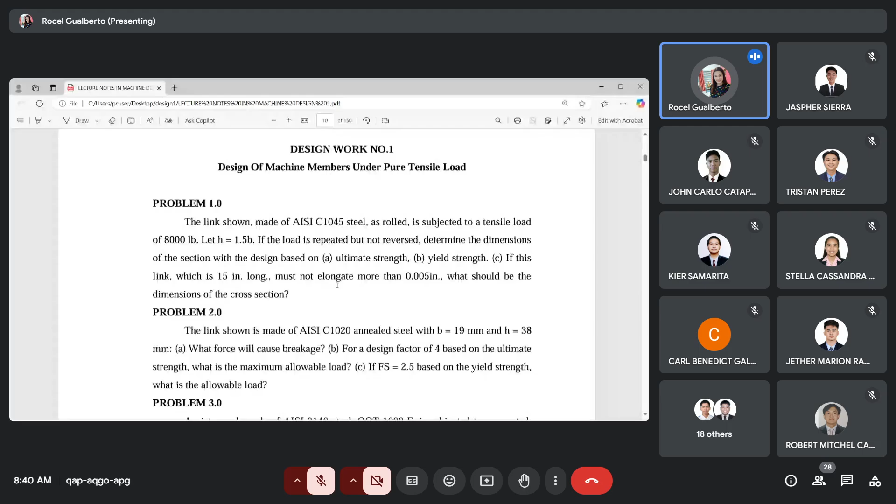Okay, so let us have here another sample problem. So, yung last po natin, yung kahapon, that is tension, but then, ang nakita lang natin, what is present only is the strength failure. So, ito naman ngayon, yung sample po na to, this problem 1, this defines now included na dito yung kanyang deformation failure. So, dito po ay paano natin malalaman na merong deformation failure if you have this phrase: must not elongate more than 0.005 of an inch.

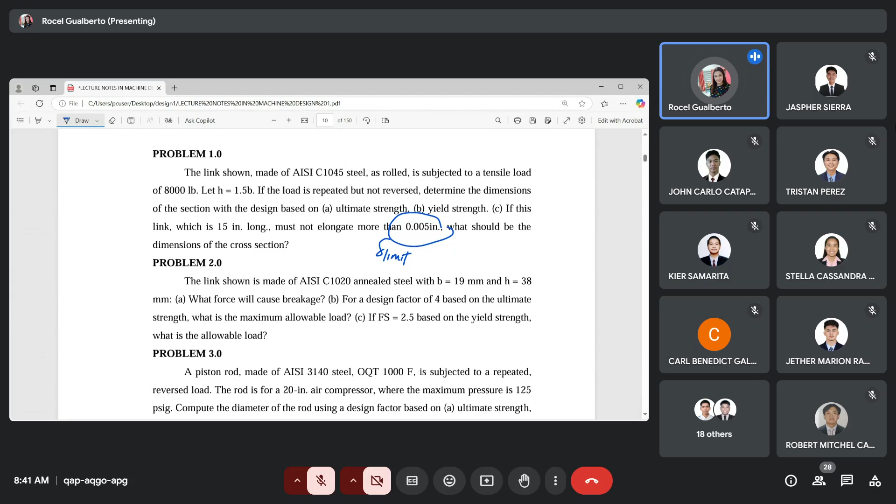So, yan po yung indicator po natin na meron po siya na allowable limit of deformation. So, if you have this value, then, ibig sabihin sa solution mo po. So, let us have this sample problem and then we try to solve this po.

So, link shown made of C1045 steel as rolled is subjected to a tensile load of 8,000 pounds. Let H equal to 1.5 B, and if the load is repeated but not reversed, determine the dimensions of the section with the design based on the ultimate strength for letter A. For B, it's the yield strength. It must not elongate more than 0.005 inch. What should be the dimensions of the cross-section?

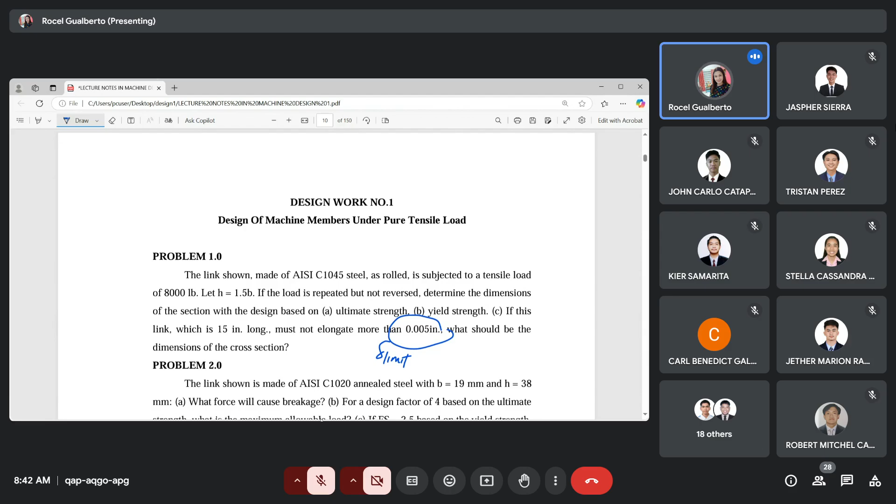So, ang isosolve po natin dito is yung ating letter C, and along with letter A. So, ang gagawin muna po natin, based on the strength failure, ang kukunin natin muna is yung base sa ultimate strength, and then we compare that with our answer based on the deformation failure. So, ayun muna po. And then, yung for letter B, kayo po mamaya yung mag-solve po nun. So, let us have this first.

So, again, we follow our procedure for the design. So, we start again with the given values. So, what are the given? First, you have there the tensile load, FT, that is equal to 8,000 pounds. So again, this is equivalent to 8 kips, divided by 1,000. And then you have the relationship H is equal to 1.5 B. So we call that the allowable limit of deformation equal to 0.005 of an inch. So these are the given values.

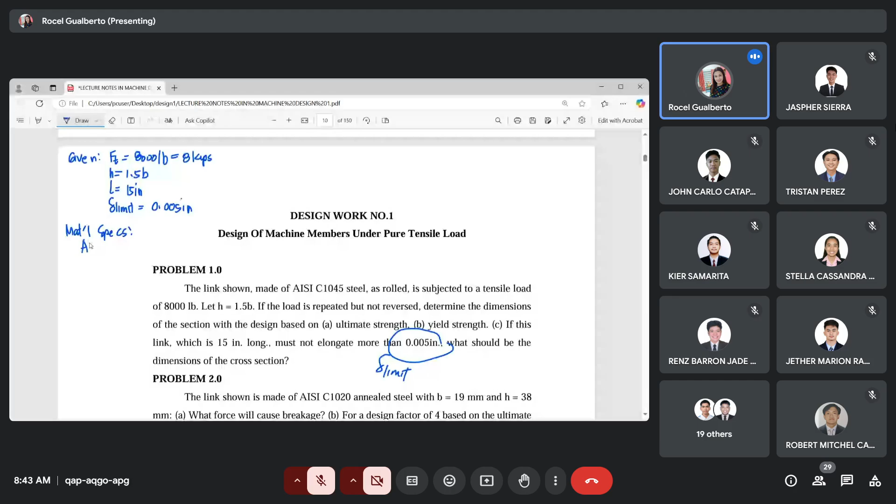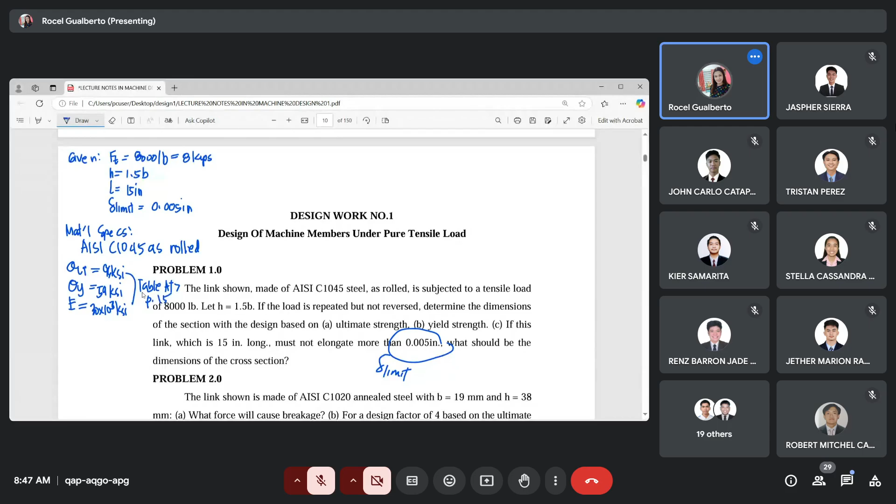After the material specification, we go with the factor of safety. So sa factor of safety po, ang sinusolve lang po muna natin is based on the ultimate strength, and you have there the deformation failure. So ito lang po ang unahin. Type of load: we have the repeated but not reversed. And then the type of material, this is 1045, therefore ductile. And then the basis of design, based on ultimate. This is for letter A. So with these conditions, repeated but not reversed, ductile, and based on the ultimate strength, what is then our factor of safety?

Ano po ang FS natin? Kier, what is our factor of safety? Hello? You use table 1.1 to define this factor of safety. What is the factor of safety? 6 po. Repeated but not reversed, ibig sabihin yan, repeated and one direction. And then ductile and based on the ultimate. What is the value, Kier? So that would be equal to 6. Thank you, Lan. So the value of the factor of safety is equal to 6, taken from table 1.1, page 1.

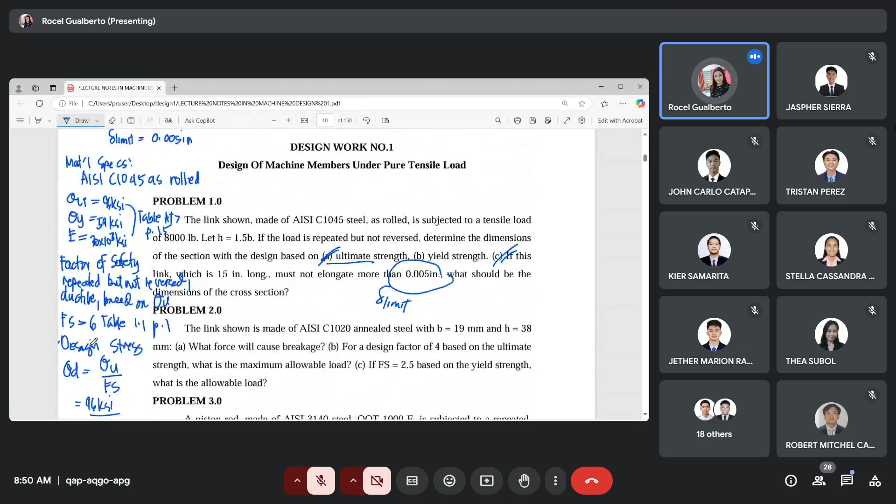Exactly 16 KSI. Okay, thank you. So you have here the design stress equal to 16 KSI. Again, after po ng design stress, doon po natin ilalagay yung atin pong basis ng design. Okay, yun pong ating procedure and the designing based on the strength failure and based on the deformation failure. Okay, so unahin po muna natin yung sa strength failure. So, considering the strength failure.

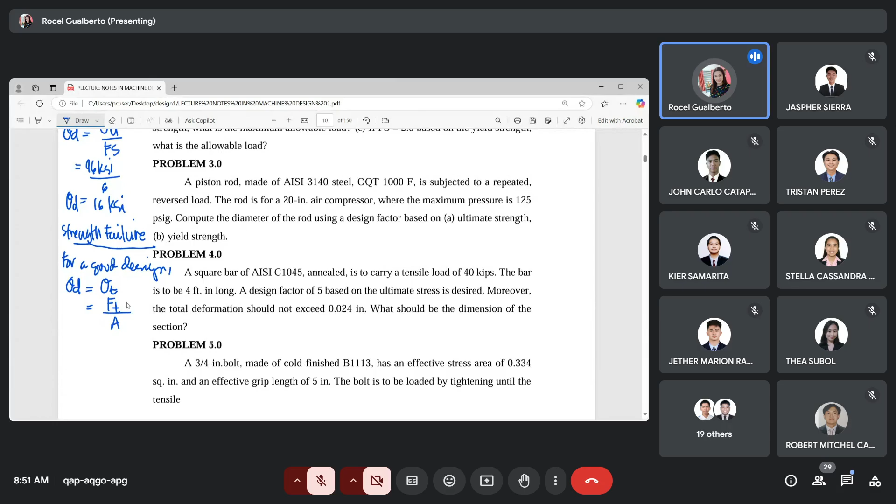Anong sabi natin? For a good design, using the strength failure, you have to equate the design stress to the induced stress of the material, which is the tensile stress. So, for the tensile stress, that would be force over the area. And what would be the area? So the area here would be yung atin pong para sa reaction is B. Relationship between B and H: H is equal to 1.5 of B. So in place of H, gagawin mo po siya na 1.5 of B. So anong magiging ito ngayon? This would be FT over B times 1.5 of B.

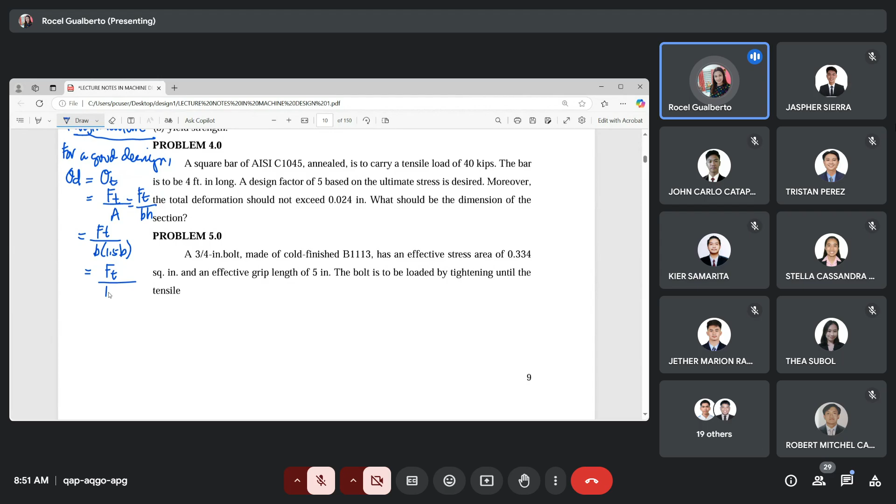So, leaving us FT over 1.5 B squared equal to your design stress. And then you substitute now the value. So the design stress na na-compute po natin initially is 16 KSI equal to 8 kips divided by 1.5 B squared. Kindly solve now for the value of B. Pakisolve nga po yung value ng B. Okay, so thank you, Tristan. 0.577 of an inch. The others, try to compute po yung iba. 0.577 of an inch. And then you look for the standard value. Likewise, you solve for H. This would be equal to 1.5 of the commercially available size.

So, pakicompute po. Now, idugtong ko muna, habang kino-compute nyo po, yung para sa deformation failure. Meron siyang deformation failure kasi may given po na allowable limit of deformation, yung pong 0.005. So, isama po natin ngayon siya sa solution. Ano nyo po yung commercially available size nito, same thing with the value of H. So this is 5/8 and 15/16. So this is 5/8 of an inch and 1.5 times 5/8 of an inch. That would give us 15/16 of an inch. Okay, so the other one would be the deformation failure.

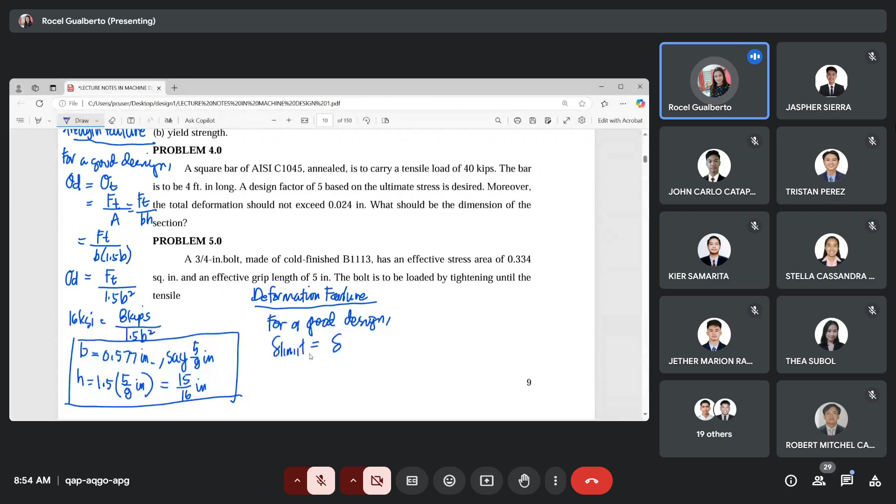So for the deformation failure, ganun din po. We equate for a good design. Ano naman po ang ine-equate natin considering the deformation failure? You equate the allowable limit of deformation to that of the computed deformation. So what would be the computed deformation? This is simply equal to FL over AE. And in place of A, papalitan natin ulit siya ng B times H, and yung H po natin is 1.5 of B. So magiging 1.5 B squared times the value of E equal to your allowable limit of deformation.

Now i-substitute nyo na po yung mga values. So this is 0.005 of an inch equal to 8 kips, length is given 15 inches, and then you have there 1.5 B squared, and E is 30 times 10 to the third KSI. So, yan po yung sinubstitute natin na values. And then, what is the value of B considering your deformation failure? Paki-compute po.

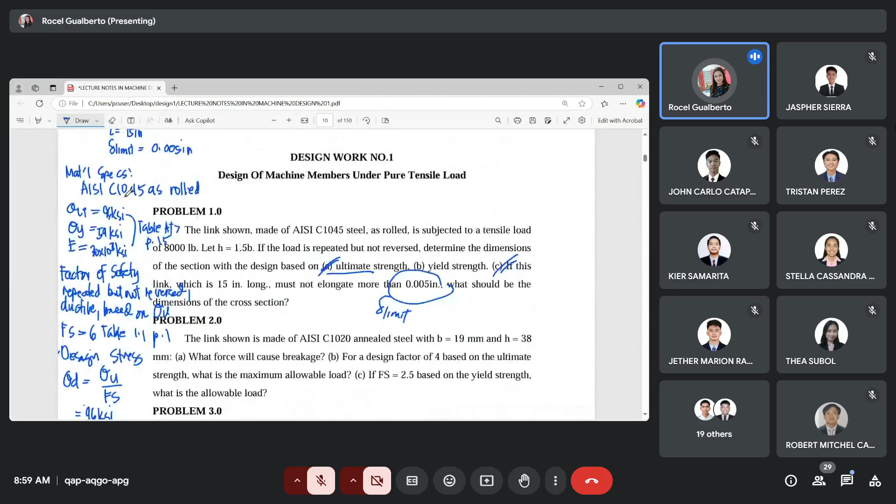Okay? So, yan po yung ating sagot ngayon. Now, so this is the final answer. So, ang ating pong solution, it has yung strength and deformation failure. But I have said, pertaining to this problem 1, yan po ay letter A lang. So, ang sagot po natin sa letter A, ito lang po talaga yon, yung sa strength failure lang. Itong 5/8 at 15/16.

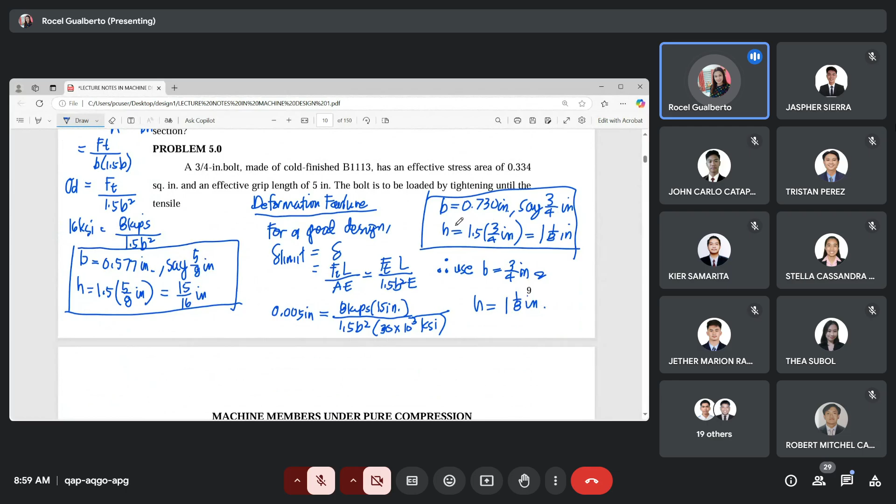Pero pagdating mo po sa letter C, ang sagot mo po sa letter C, itong dalawa. Itong buong to. So, dapat may strength failure ka, may deformation failure ka, tapos ito yung pili. 3/4 and 1 and 1/8. So, you go now with letter B. So, paano mo naman po isosolve yung letter B?

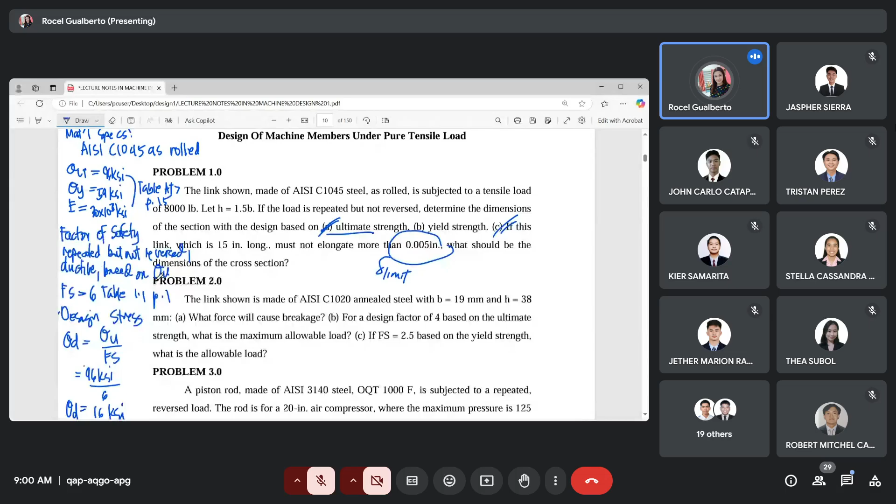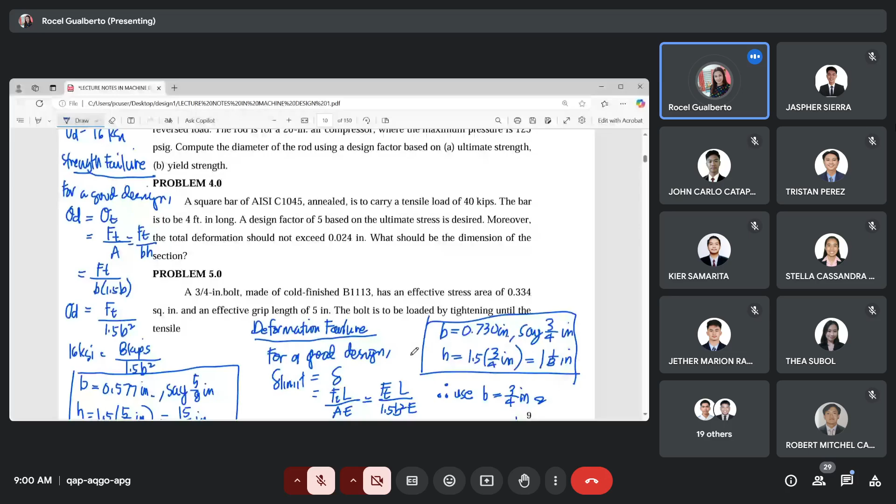Kasi iba na yung factor of safety because the basis of design now would be the yield strength. So, mapapalitan po ang Fs, ang design stress, same thing with yung sa strength failure po natin. But then for the deformation failure, hindi po yan mababago, because this is not dependent on your value of sigma u or sigma y. So, ito pa rin yung sagot.

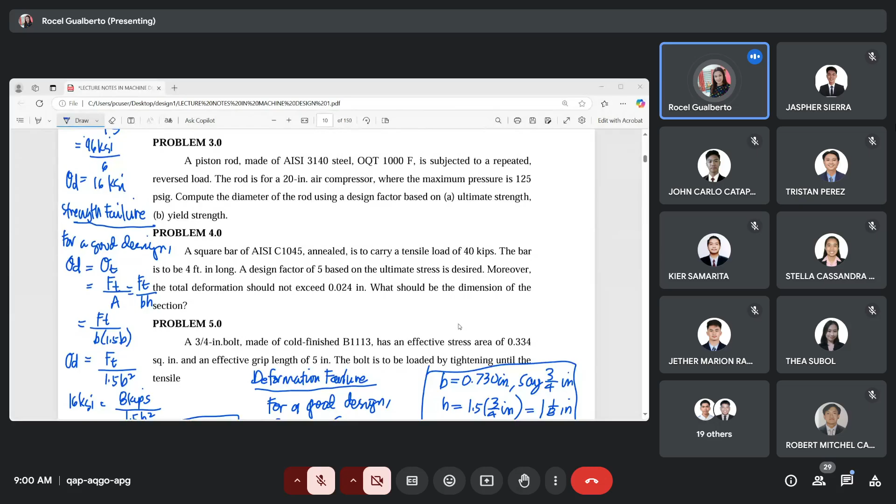So, ang gagawin mo ngayon is to compare. Ano yung nasagot mo based sa strength failure, based on the yield strength, and you compare that again with this value of the deformation failure. Whichever would be higher, then that would be your conclusion. So, ganun nyo po ngayon gagawin, yung para po doon sa basis ay yung yield strength for that of letter B. So, B yun, tapos kadugtong din nun yun yung sa letter C.

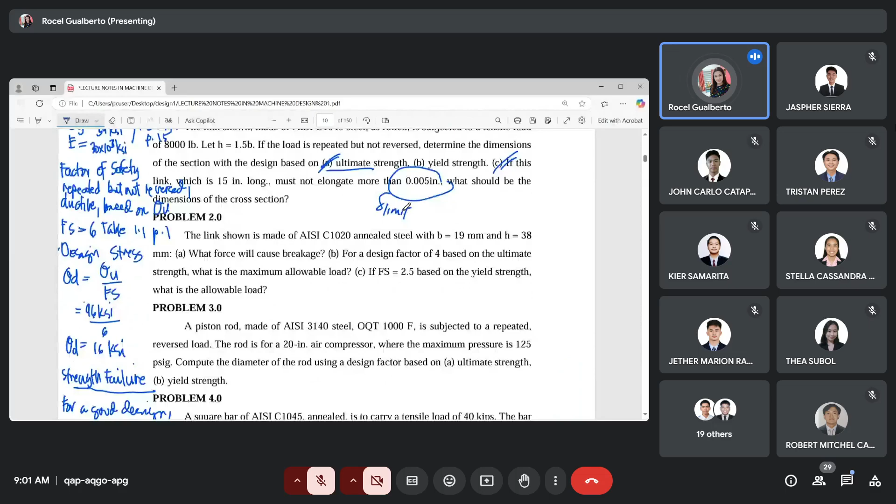Okay, sige po, gawa nyo muna po yung para doon sa basis ng yield strength, and tingnan natin ano yung ating magiging sagot. So again, simula po sa factor of safety, factor of safety up to the strength failure. Yun lang po yung gagawin mo based on the yield. Sige po, continue. And then you post your answer here po. What would be your answer on the strength failure on this basis of yield strength? Tapos compare with the deformation failure po natin afterwards.

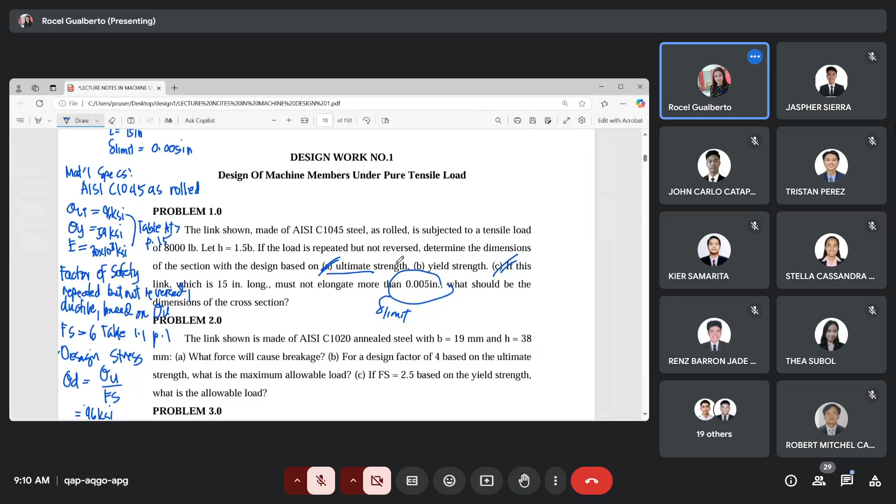So, linawin ko lang po ano po yung mga sagot natin for this problem 1. So, pag dito po sa letter A, determine the dimensions of the section with the design based on the ultimate lang. Kumbaga, hanggang dito lang yung letter A. So, pag letter A lang, ang i-consider natin, strength failure lang po yan. So, ang sagot po sa letter A, yan po yung 5/8 and 15/16. Yan po yung sagot.

Pagdating naman po sa letter B, based on the yield strength lang. Based on the yield strength lang, ang sagot mo po dyan, yung sinolve nyo po, na 9/16 and 27/32 of an inch. Yun po lahat lang sa letter B.

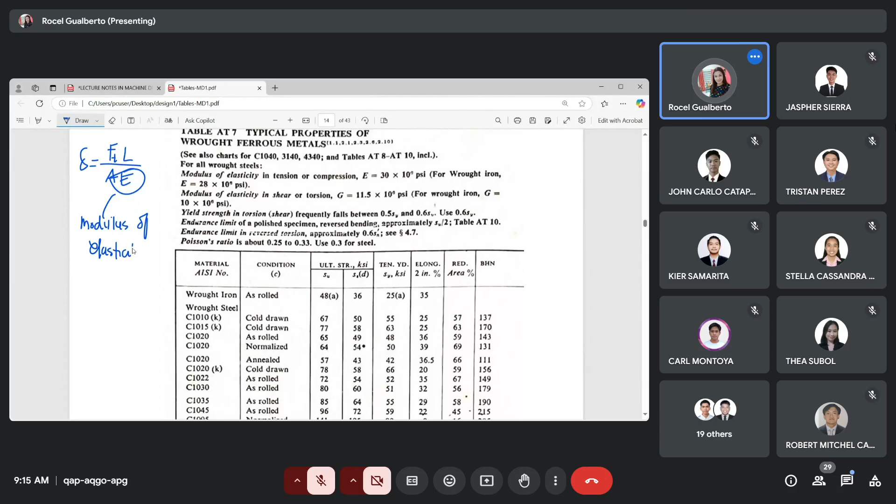Okay, over area times E. E here pertains to modulus of elasticity. Okay? This is modulus of elasticity. Okay, so this one, this is simply an elongation.

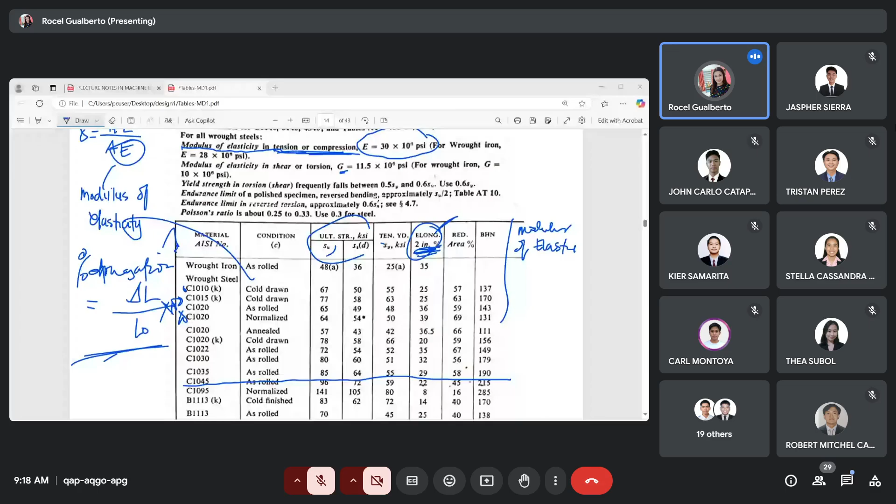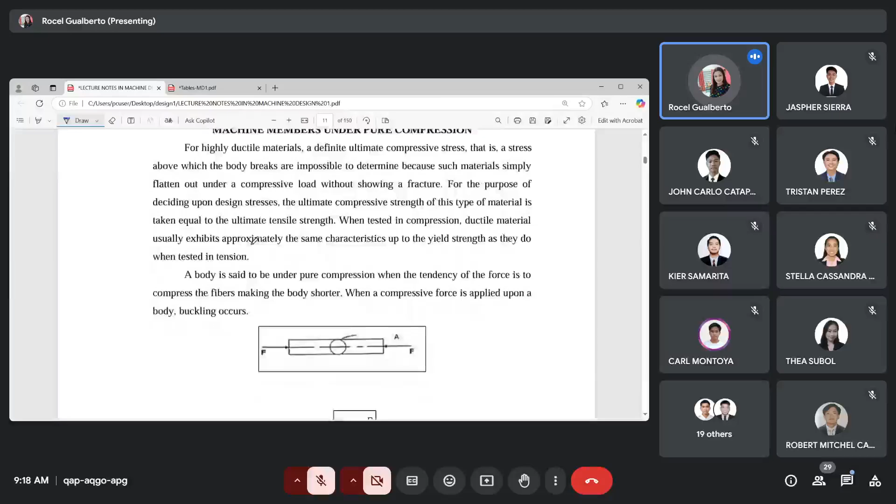Let us have now the second topic, which is this time the member is under pure compression. So, what is basically different? The applied load now tends to compress your material. So, it pushes on the area of your material. Hindi po katulad nung nauna, hinihila niya.

Push naman po yung ginagawa, or it tries to compress the area. Okay? So, you look at the illustration here, the member. This is your compressive load. This is your material and then the applied load FC.

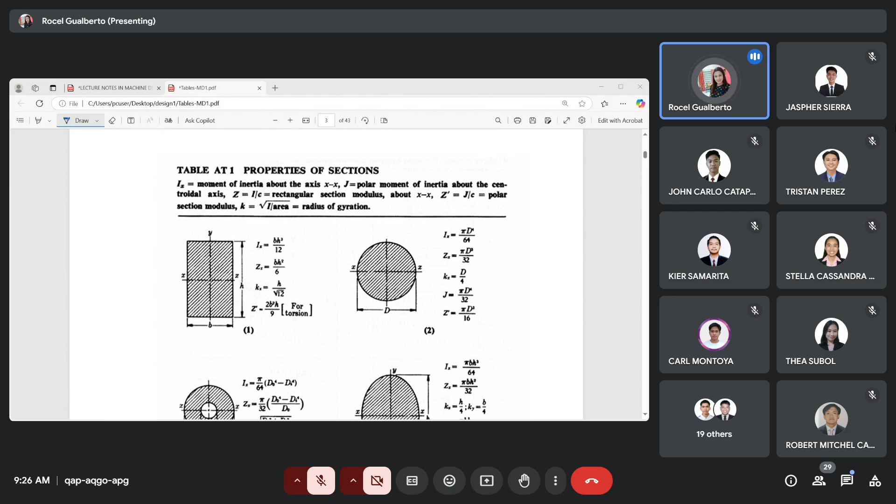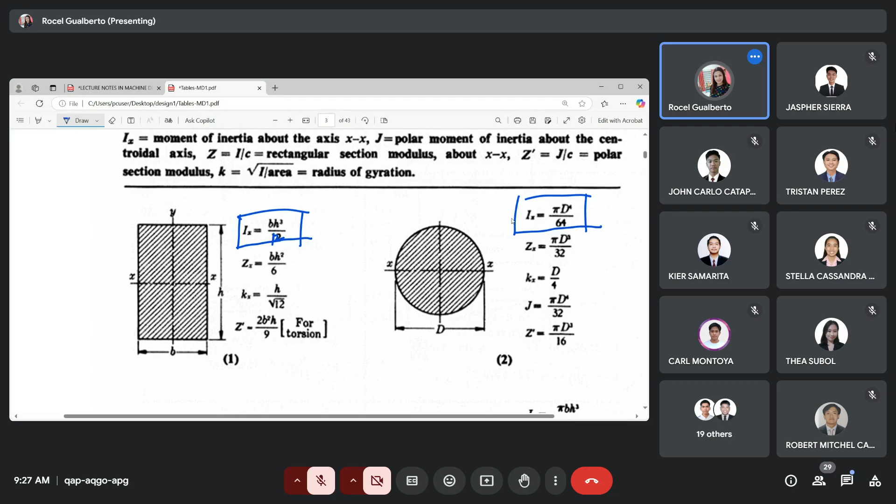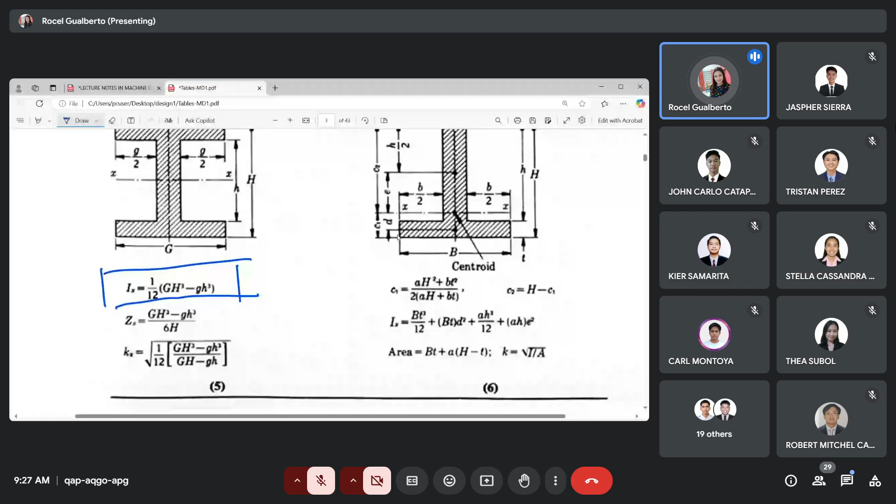Ito po yung tinatawag natin simply as economic sections. I hope alam nyo po paano gamitin, paano i-derive ang economic sections. Dito po, limited kasi it's limited only to these two types of economic sections, yung letter I at saka inverted T.

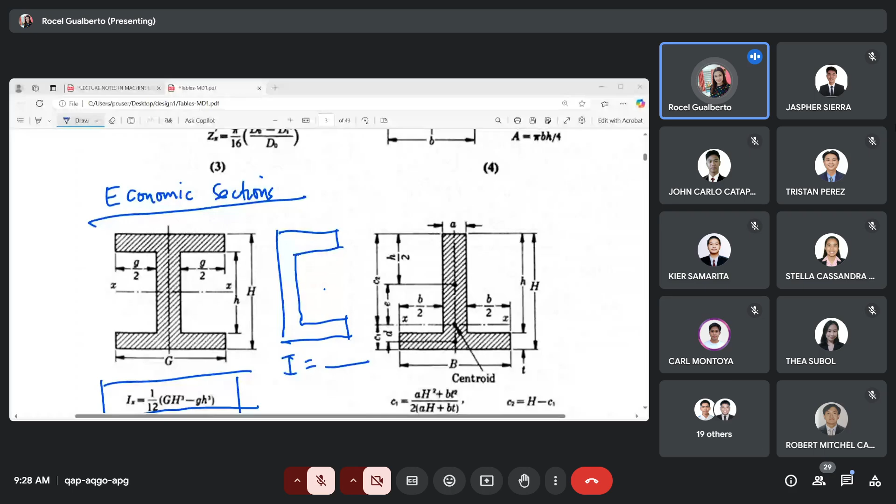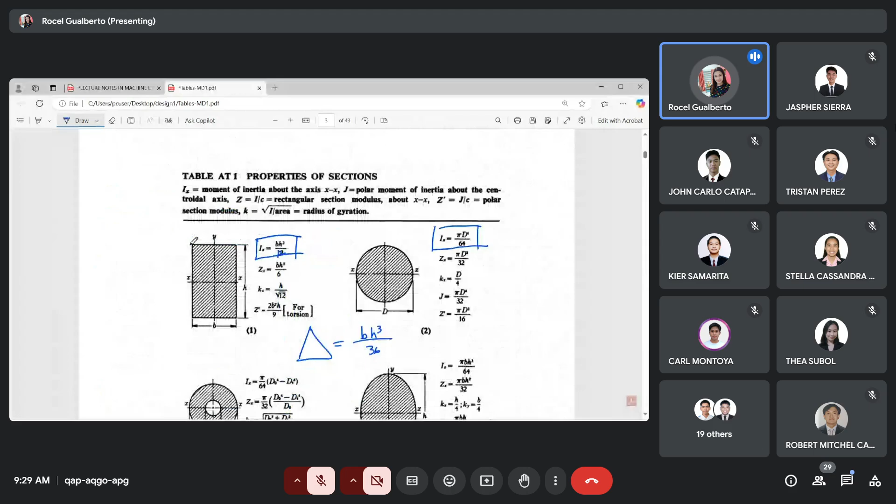Paano po kung bigyan tayo ng letter C na cross section? Dapat tandaan natin kung paano ba... I will be recalling again kung paano siya gawin. But if you have your notes pa rin dati sa MDB, pwede nating balikan at makita kung paano ang mga values ng I or moment of inertia ay na-derive. Pero for the moment, pwede tayong gumamit ng table AT1 para sa values ng I. Limited lang po siya sa mga cross-sections na ito. Kung binigyan tayo ng iba at hindi natin alam mag-derive, wala tayong magagamit as our value of I.

Saan po natin gagamitin ang moment of inertia? It will be used for the least radius of gyration, which is the square root of I over the area. Ito po yung moment of inertia.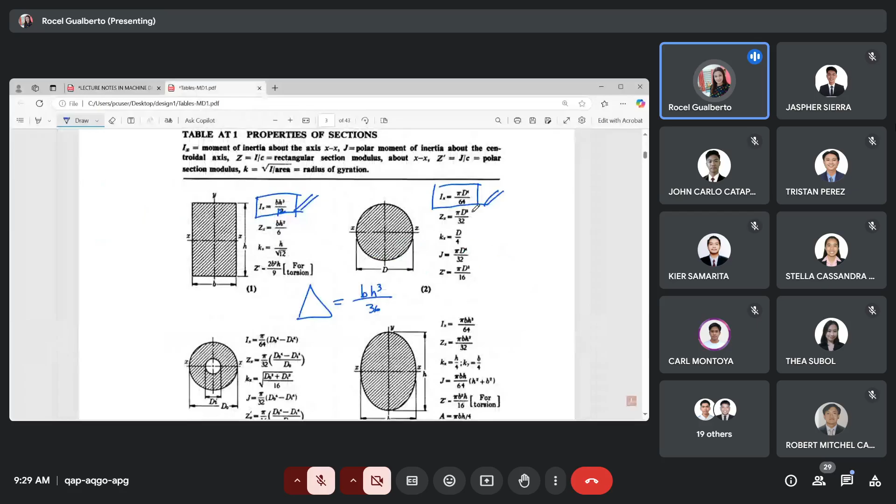Let us take the case if you have a circular cross-section. Let us derive the value of K, using I over the area. Ano ba yung I if you have a circular cross-section? Pi d to the 4th over 64. Yun po yung ipapalit natin dito in case of I.

So this would be equal to square root of pi d to the 4th over 64, divided over pi d squared. You can cancel out pi. You have d to the 4th and d squared, may dalawang matira, 4 and 64. This is 16, so ano na lang ang natira? That would be square root of d squared over 16. And this is a perfect square, so pwede natin ilabas ng radical sign. This would be equal to d divided by square root of 16, which is equal to 4.

So yan po ang ating K, d over 4. This is valid only for a circular cross-section. For other cross-sections, halimbawa rectangular, you need to derive ulit. Kapag rectangular, you start with K equals square root of I over area. Ano yung I? For rectangular, BH cube over 12. Ano yung A? That would be B times H. Saka nyo po uli siya i-simplify to obtain the value of K.

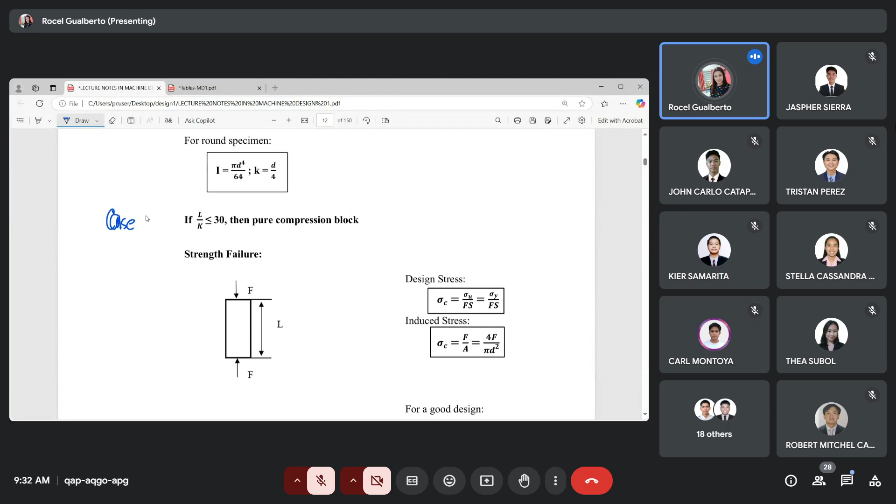So this would be your first step in designing a member: solve for K, then the length divided by K, and once alam na natin yung slenderness ratio, you go with this, so this is what we call case 1. Case 1 is when slenderness ratio is less than or equal to 30. Kukunin mo muna, first step mo is to obtain the slenderness ratio.

Kung nakuha nating slenderness ratio is less than or equal to 30, then we call it a pure compression block. Alin yung pure compression block? A pure compression block are those compression members wherein kapag in-applyan mo ng compressive load, it simply has contraction - yung parang maliliit na members, katulad ng sample ko kanina, na pag in-apply mo ng compression, ang tendency ay magkaroon lang ng contraction, mag-reduce lang yung kanyang original length, having a slenderness ratio less than or equal to 30.

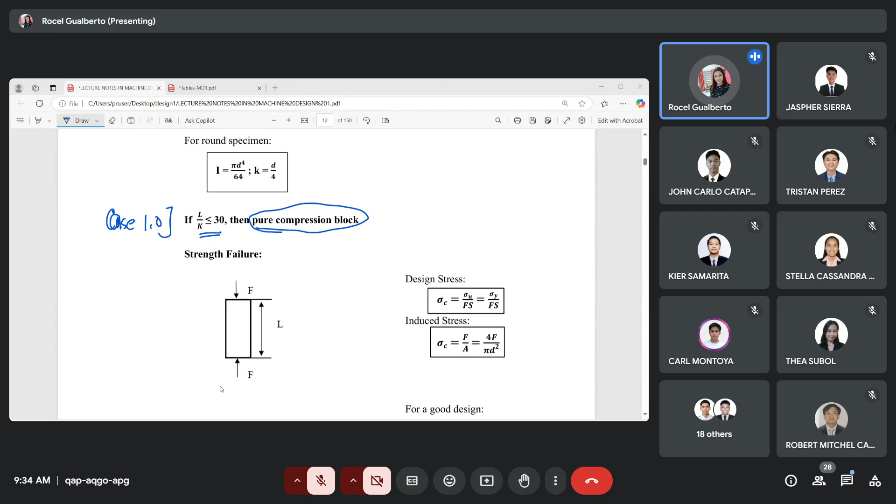Paano natin i-design yung ganitong klase ng compression member? I-design mo siya katulad lang ng sa tension. Ganun din lang kasi yung nangyari sa kanya - ang pinagkaiba lang, yung isa ay elongation, this time it is contraction. Sa halip na humaba, ngayon umikli, pero basically, same lang yung effect. So you have to design it katulad noong sa tension natin. Paano nga ba ulit natin dinesign yung ganun? It is based on the strength failure, and then the other one is based on the deformation failure. Parehas lang po yung procedure natin. Pag strength failure, for a good design, you need to equate the design stress to the induced stress of the material.

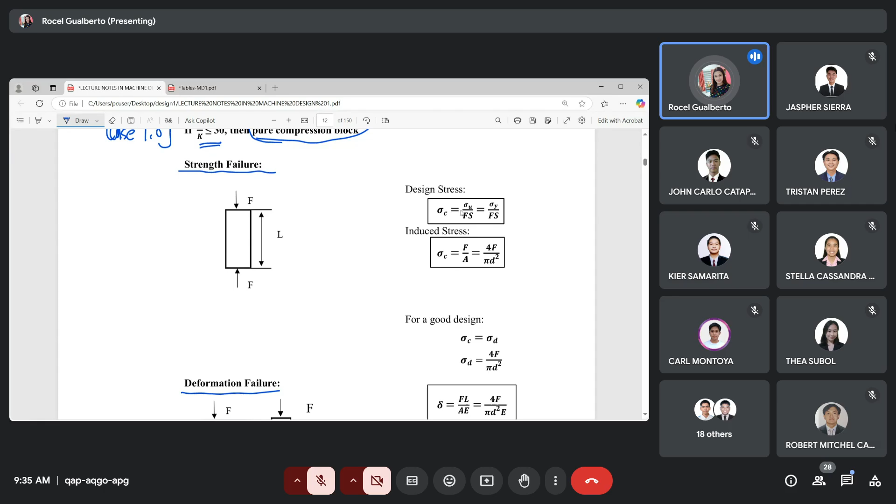Okay, what is then our induced stress ngayon? So ang induced stress po natin dito, ang tawag po natin ay compressive stress. Okay, so compressive stress po ang tawag. So for the compressive stress, ang symbol po natin is sigma and then subscript C.

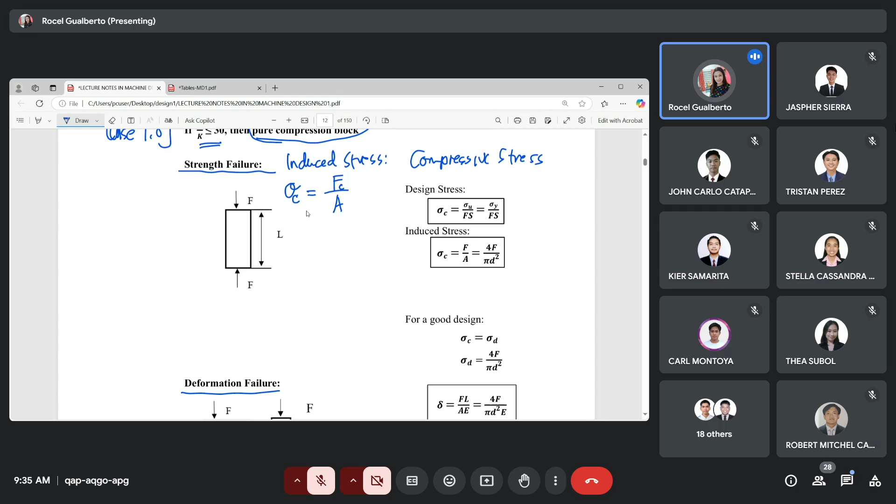So same equation po yan doon sa tension. So force divide area. This time lang po, ang ginagamit natin is a compressive force. Okay, at kung po yan ay halimbawa circular ulit, okay, ano po pi d squared over 4. Okay, so ito lang po yung napapalitan, yung A po natin. Kung rectangular po yan, ano yung A na yon? It would be base times the height. Okay, so yan po yung kanyang induced stress.

And when we say if it's a strength failure, for a good design stress, okay, so you equate the design stress with the induced stress of your material. Okay, so ang induced stress natin is the compressive stress. Okay, and what would be the equation?

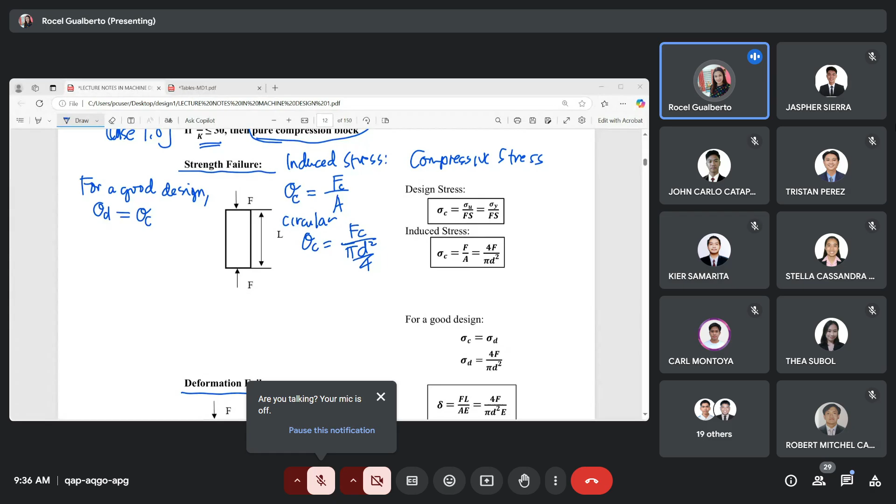Okay, so what would be the equation? Okay, so this would be equal to FC over A. Or you say kung circular as our example, it becomes pi d squared over 4. Okay, at ano po yung gagamitin natin na sigma d? Yung sigma d, it can be sigma u over factor of safety if based on ultimate. Okay, if based on yield naman po, sigma d would be equal to sigma y over factor of safety if that is based on yield. Okay, so yan po yung gagamitin natin para dito.

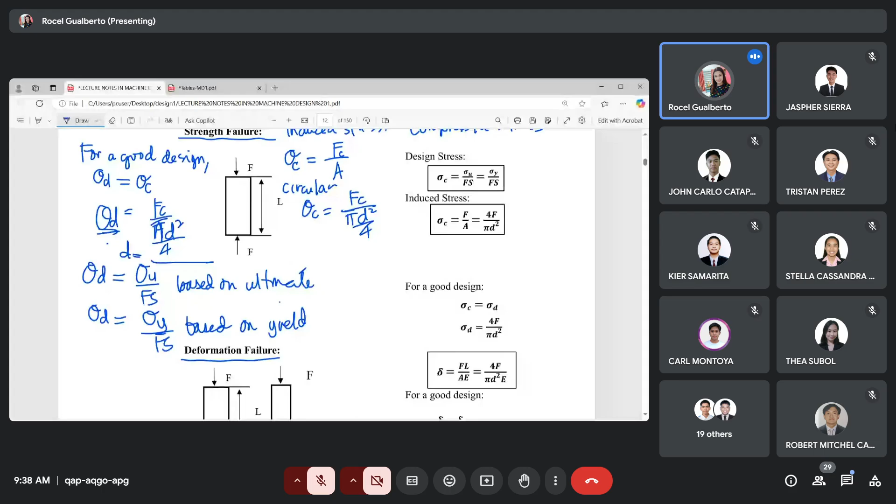Okay, from this equation, you can solve po nga po nung sa atin sa tension. Okay, likewise, sa deformation, ganun din po. Okay, so deformation, again, deformation is equal to FL over AE. This time, we will be using a compressive load. Okay, and then yung klase ng deformation niya, itong ngayon ay tinatawag natin as load applied, okay, contraction. But then basically, the same lang po yung equation, FCL over AE. So ang lang po natin po yung area po natin, okay, is pi d squared over 4 kung siya po ay circular. So FCL over pi d squared over 4 multiplied by E equal to the deformation.

And sa design, how do we deal with this deformation failure? To come up with a suitable dimension, so for a good design, we equate allowable limit of deformation to the computed deformation. So FCL over pi d squared over 4 multiplied by the modulus of elasticity equals the allowable limit. And then from there, you could obtain another diameter or another dimension. Okay, so again, dalawa yung naging sagot po natin dito. Okay, you have to choose na you must have your conclusion. Therefore, use the bigger dimension. Okay, between the two.

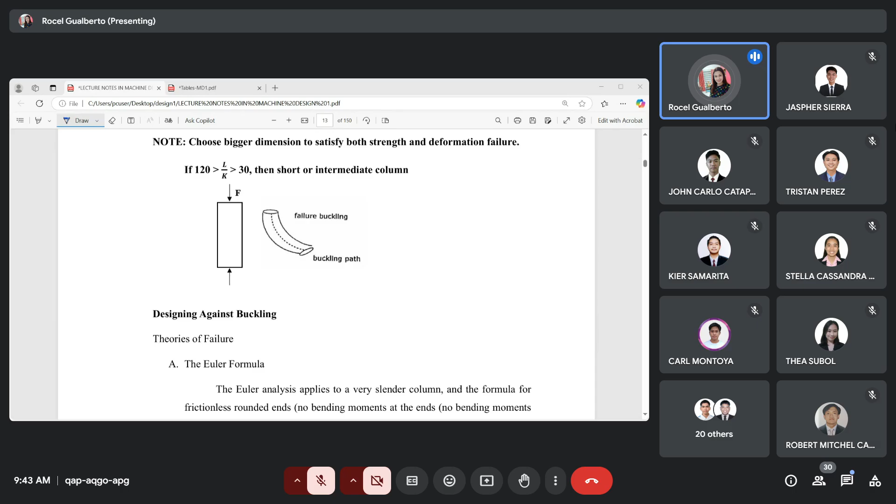Okay, so we go now to our case 2. So this time naman po, ito po yung atin na case 2. So this time po, sa case 2, the slenderness ratio L over K, that is in between 30 and 120, okay, so nasa pagitan po ng dalawa. Okay, yung kanina po, up to 30, okay, yun yung case 1, less than up to 30. Okay, so ito naman po, nasa pagitan ng 30 and 120.

So ang tawag po natin dyan is an intermediate column. Okay, and po dyan, you can see there already the buckling. Okay, so see the illustration there. Okay, so that is diretso lang, but then nung nangyari, in-applyan mo ng compressive load, it becomes now, nakikita mo na meron siyang bending. Saglit lang po ha.

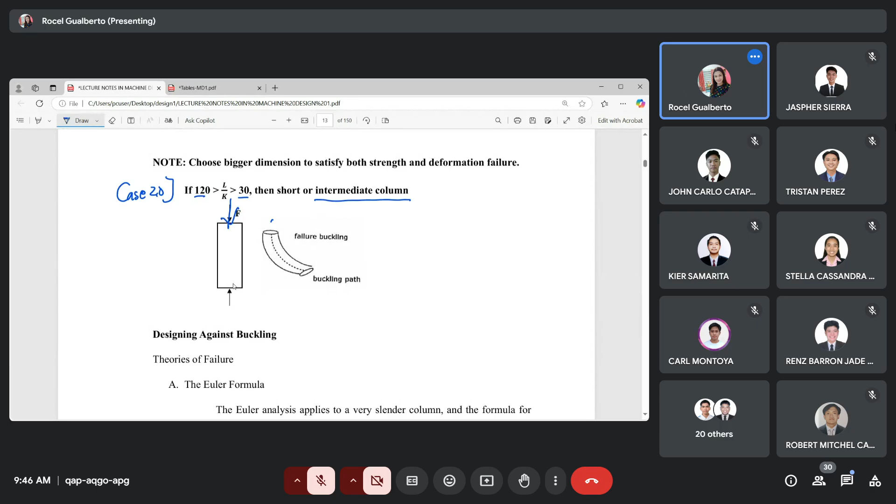Okay, so this is our case 2, intermediate column. So dito po, meron na po tayong nakikitang buckling failure. Okay, so ito po yun. Pag kinompress mo po siya...

Okay, so we start po with our stress strain diagram. Okay, so doon po tayo sa ductile. So di po ba ganyan yung stress strain diagram nung ating ductile material.

Okay, and then nawala ako. Hello, nawala na naman. Okay, I'm back na. Hello. Naririnig na po ulit. Yes po, ma'am.

Okay, so we go first with our stress strain diagram. So this is a typical stress strain diagram for a ductile material. Okay, so pwede po natin siyang hatiin up to our proportional elastic limit. Okay, ito pong area na to...

This is what we call your elastic zone. Okay, so this is the elastic zone from the word itself. Yan po yung area kung saan if you apply a load to the material, it will have the deformation. Okay, but once na inalis mo po yung force, okay, it will go back to its elastic zone.

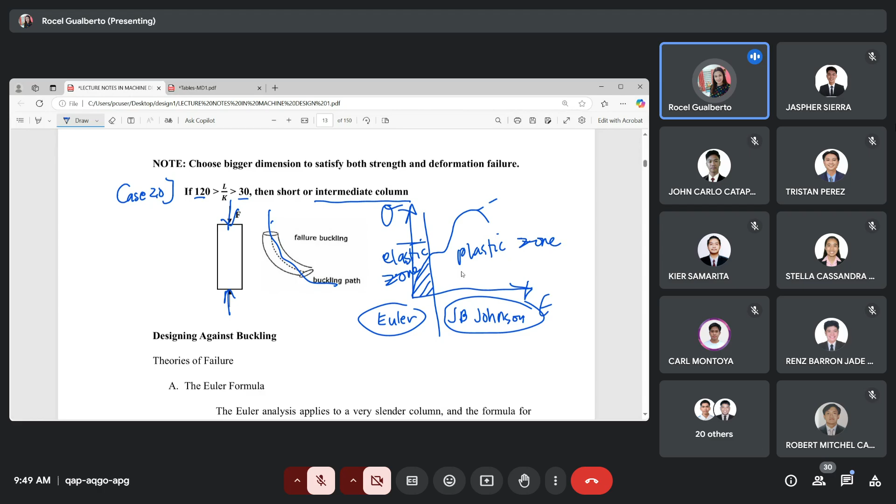Okay, dito naman po ang failure po is governed by what we call the JB Johnson. Yan. So, JB Johnson po na failure ang ginagamit dito sa plastic zone, Euler po doon sa elastic zone. Okay, so yan po yung two theories of failure against the buckling.

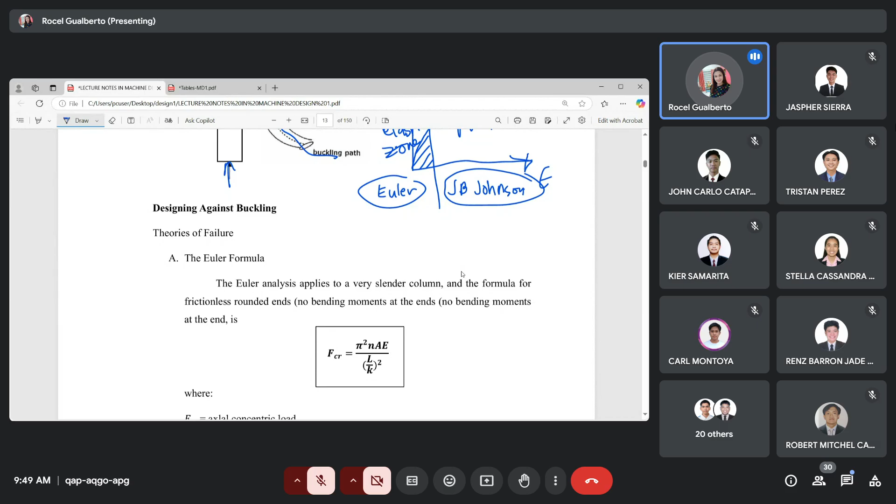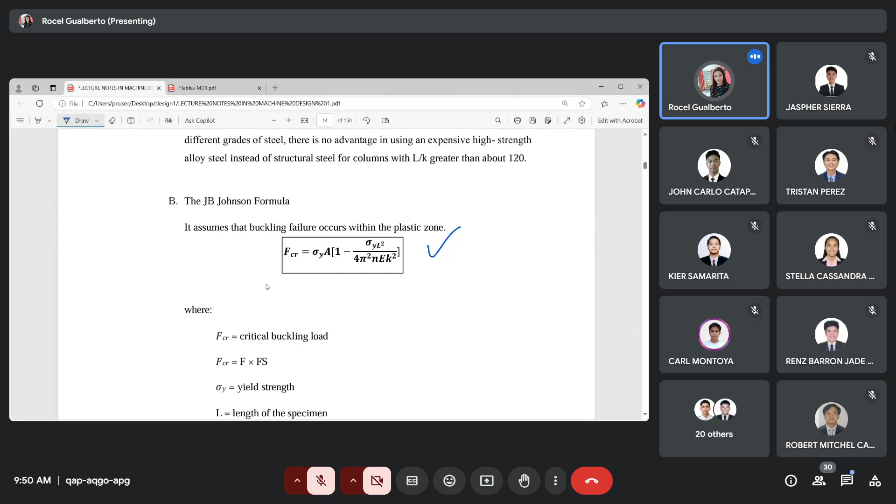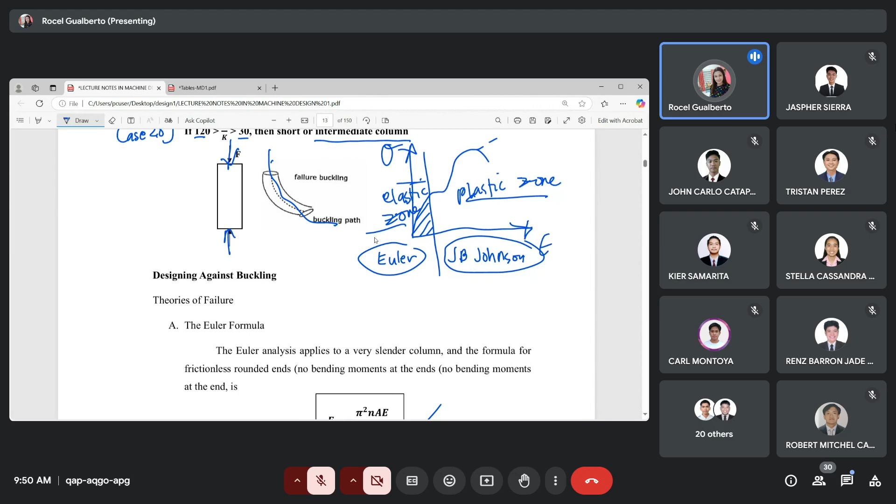Okay, so you have the equation for the Euler, and then the other one po is the equation for our JB Johnson. Okay, so this is the JB Johnson formula. The other one is the Euler formula. Okay, so ibig sabihin, ang JB Johnson formula gagamitin natin sa plastic zone at ang Euler gagamitin natin sa elastic zone. Now, how do we design the member?

Okay, so dito po tayo, hanapin nyo po sa lecture notes nyo po yung general guide in designing the buckling failure. Okay, general guide in design, okay, para po i-design yung case 2. Okay, ito po yung procedure para sa case 2.

Pag nakita mo po kasi na siya ay intermediate column, hindi mo po pwedeng i-apply yung procedure doon sa case 1 na nag-strength failure ka, nag-deformation failure. Hindi mo po yun pwedeng i-apply kasi may buckling failure po dito. Okay, para pong may ano na siya, may bending na. Okay, kaya ang i-apply mo pong method, ito pong method na ito.

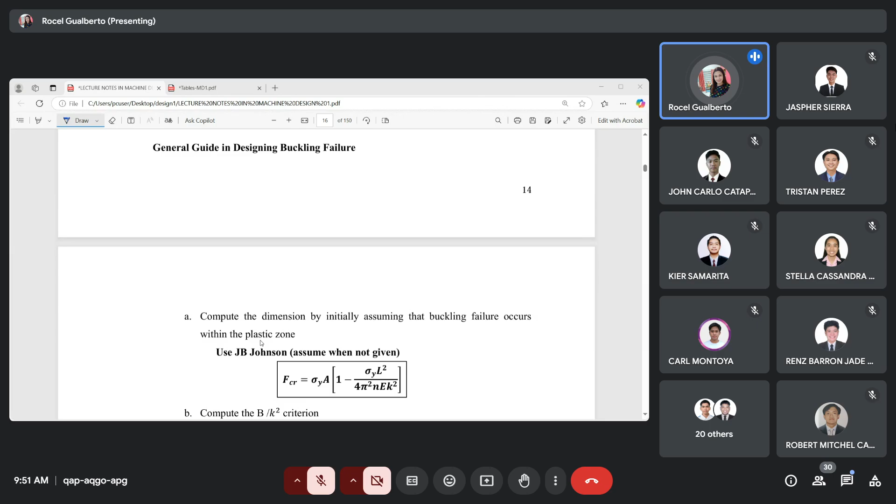Okay, this is the general guide in designing the buckling failure. So paano po siya i-design? Una, ano pong sabi dito? You compute the dimension by initially assuming that failure, okay, occurs within the plastic zone. Okay, so ito muna po yung una mong gagawin. Okay, i-assume mo muna po.

Okay, so you look at the equation now for the JB Johnson. Yan muna gagamiting equation. Okay, JB Johnson. Okay, now tingnan po natin saan po natin kung F or the critical buckling load. Okay, so this is called the critical buckling load.

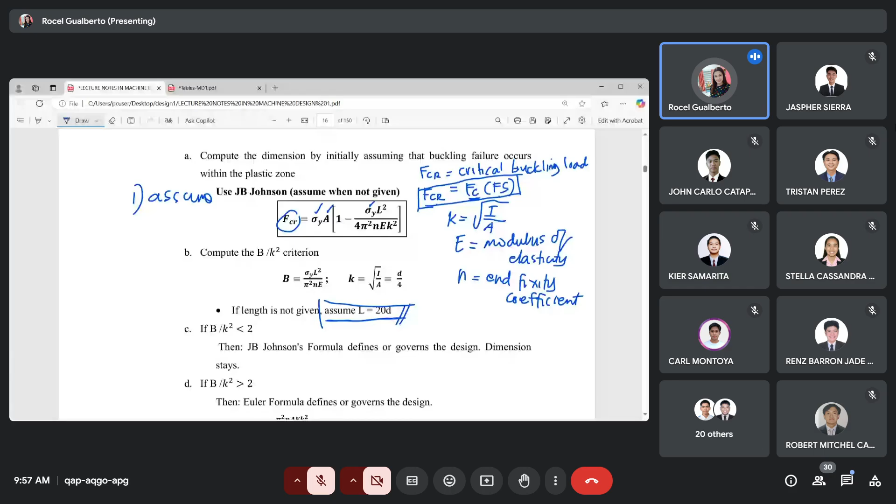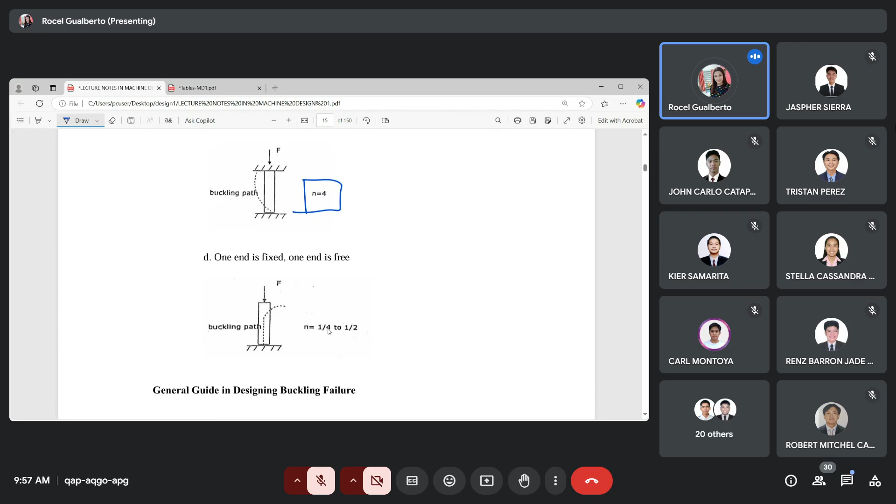And what are the values of this N? Saan ko ma'am kukuhanin ang value nung N? Balikan nyo po yung una-una po lang na page. These are the values of the N fixity coefficient: N equal to 1, N equal to 2, N equal to 4, and N equal to 1/4 up to 1/2. Ang N fixity coefficient is dependent on the conditions nung ends po nung ating compression member.

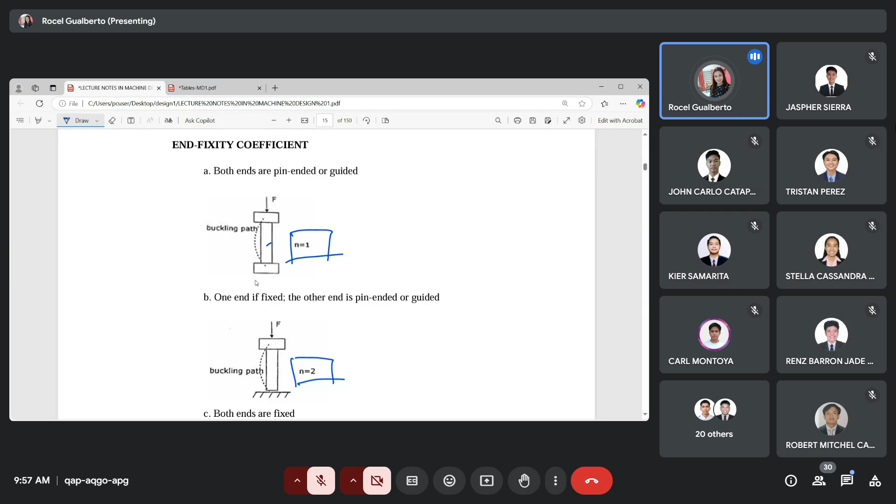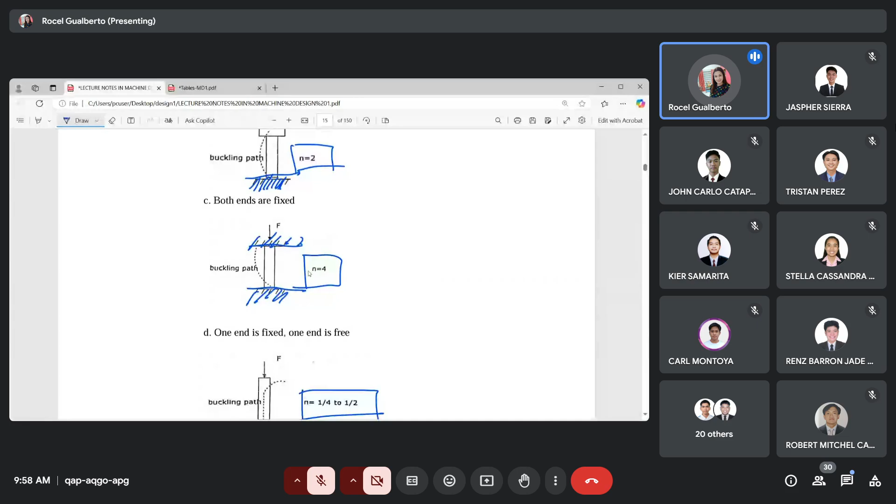Katulad po nito. Ito po yung compression member, and both ends are pin-ended or guided, so N equal to 1. Dito naman po, N equal to 2 when one end is fixed and the other is pin-ended or guided. Pwede pong nandito yung fixed, tapos nandito yung guided, parehas lang po yun. When both ends are fixed, N equal to 4.

And one ay 1/4 to 1/2. Again, this comes in a range po. We ought to use the maximum value na lang para pare-parehas yung sagot natin. Pero kahit po alin dyan, on our design, pwede po natin gamitin at i-apply. So these are the values of n na gagamitin natin on the equation.

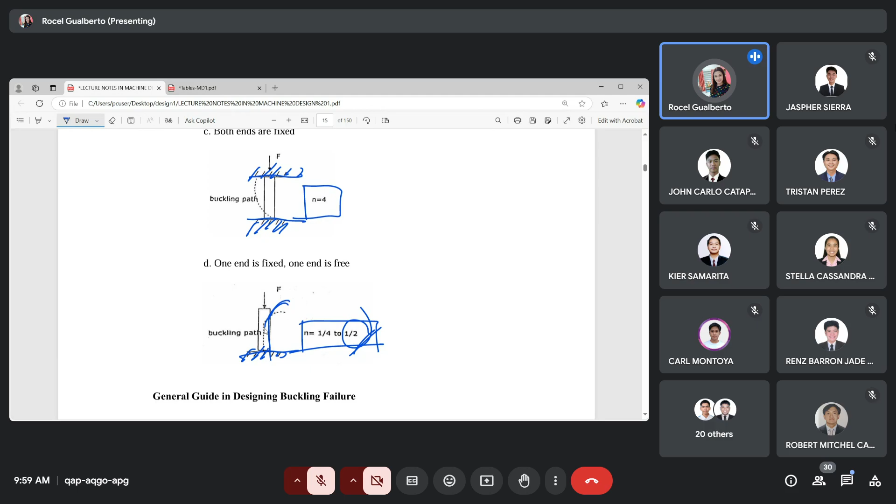Now, ano po ba ang effect niyan when you have this n fixity coefficient? Nakita nyo po sa illustration natin, see the buckling path. Pag po in-applyan mo ng force, magiging ganito yung ating member. You observe po na iba-iba yung nagiging buckling path niya depende sa conditions ng mga ends natin.

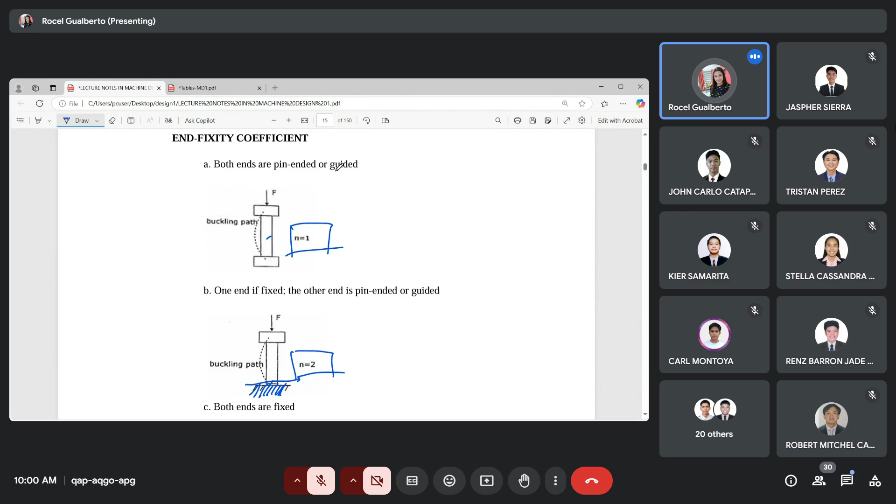Now, saan po natin malalaman ang condition ng ends? They are discussed po doon sa problem, or you can analyze it from the given mechanical component. Kung hindi naman po, our assumption is that both ends are pin-ended or guided, kapag hindi binigay sa atin yung condition ng ends. So we assume this n na gagamitin natin.

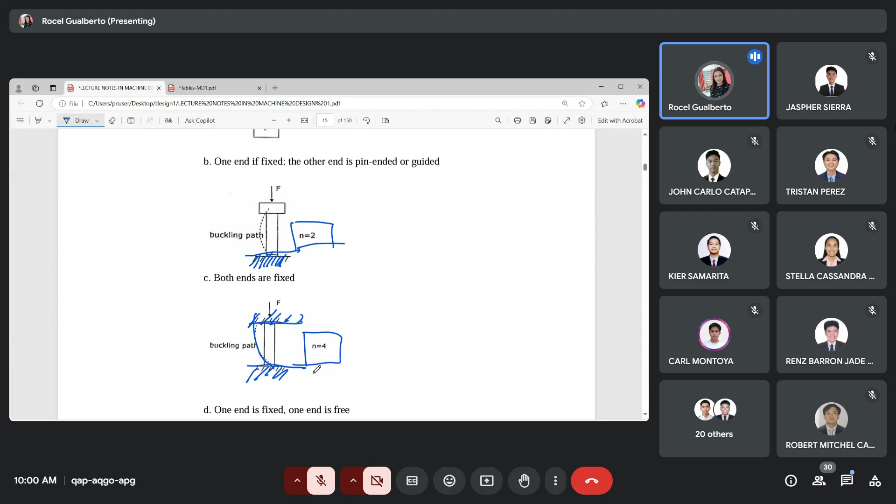May question po ba tayo? Hello? Wala pa naman po, ma'am. May kasunod kayong klase? Meron po. Sorry. Hello? Okay. So anyway, i-close ko na lang muna dito.

So ang ating procedure for case 2 starts with the JB Johnson formula. May kasunod pa po siyang procedure, i-discuss na lang po natin by next meeting. Basta ang una pong gagamitin, JB Johnson. We assume that the failure occurs at the plastic zone, meaning meron na po siyang permanent deformation. Pakibasa na rin po yung kasunod nito as your assignment.

Yes po. Okay. Yes, Lan. Yung L equal to 20D, that would be for circular cross-section only. Any other? May question pa po yung iba?